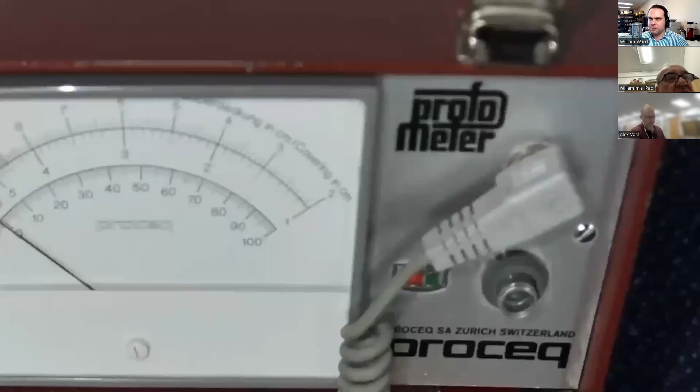Also today, I'm pleased to be introducing the latest generation of the Profometer cover meter. That's the PM8000. We can see the original Profometer here. And now we have what we're showing today, what we've come to. And we'll have a full demonstration of the application and the cover meter operation during today's presentation. We'll get to that towards the end.

So once again, we're going to begin. Now, does that video come through clearly for everyone? Is everything flowing smoothly on the operational side? Yeah, looking good. Now we're good, yeah. Excellent. Thanks so much.

So look, what I'm going to do from an education standpoint today, I want people to understand the pulsed eddy current cover meter theory. I always like to talk about this for cover meters because it's what makes them such a precise measurement tool, but it's also something where it's easy to get it wrong or to not see how it makes the procedure need to be a careful one when using the tool. We'll also talk a bit about what we can measure and what we can't measure of different reinforcing types and structures and ways of building things.

We'll look at how to scope up a cover measurement procedure. So I've got everything from basic spot measurements, which might be great for quality control, up to an overlaid 2D map of the reinforcing layout, which is ideal for showing an output to someone: here's what you really have, and here's the bits that are of concern. So we'll go through all of that. I'll give you a procedure, which I personally like as a way to get a precise, careful cover measurement as unaffected from interference as possible.

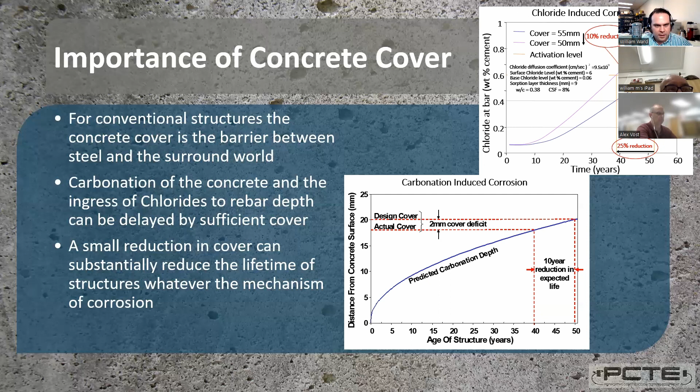So this is not a corrosion presentation. There's always the chance to go back into more detail on these areas. But I do want to highlight this as we keep going forward. So I did ask you all to send me a few questions before we begin today's presentation. There were only a few that came in.

Someone wanted to see a comparison of the PM8000 to the Profoscope Plus and Profometer models that were available from Proceq or Screening Eagle Technologies before. The basic thing there is the PM8000 is available in two models: a PM8000 Basic, which is only a spot measurement cover meter, and that's loosely feature equivalent to a Profoscope Plus cover meter, which was one of our most popular products prior to the launch of the PM8000. Whereas the PM8000 Pro, which has full integration with the PM Cover Meter app, goes to the same level and beyond the functionality of a Profometer PM650.

So the PM650 offered cross-line scan, showing the reinforcing steel in two directions on a structure. It also had the ability to import and export full presentation and a variety of other tools. The only functional difference on the Profometer PM8000 is that the app goes a step beyond. It includes augmented reality and a cloud-based data flow, but currently it does not integrate a Profometer corrosion capacity. So your half cell potential measurements would still be done using a different machine. This is a cover meter only in the current configuration.

Now, best results for reinforcing size and position I will be covering during the general presentation, so please hold on, along with the depth and accuracy of the PM8000 cover meter. Now, for depth of hold down bolts, generally, you don't want to be offset. Your successful location and measurement with a cover meter is very dependent on the reinforcing steel being oriented straight behind our scanning probe. And I'll show you how to do that as we work.

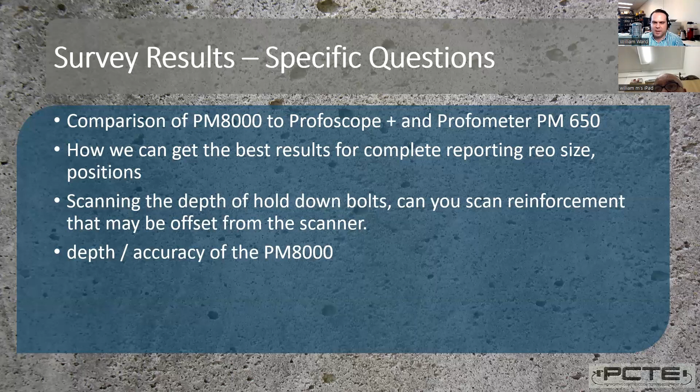But if you do have a more unusual job, things like maybe tie rods in brickwork, we can perhaps use our cover meter's signal strength detection as a tool. But I generally don't suggest using cover meters outside their specific purpose, which is accurate, precise depth of reinforcing steel. That said, we do have other technologies we can bring in to our hunt for detail.

So I'll be mentioning today Screening Eagle Inspect as a hub for data from all of these kinds of machines and going beyond that. I've also already contrasted its performance to ground penetrating radar tools and ultrasonic tools like the Pundit Impact or Pundit PE and UPV. Schmidt hammer is a little outside the context of today, but our main focus is Profometer, cover and rebar diameter, rebar characterization. That's what we're focusing on today.

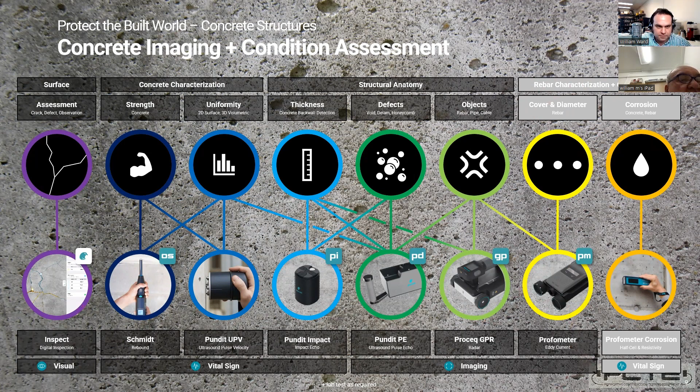Now, back to our survey, and this is always something which I have to talk about every time, because I've been working to support our customers in the industry with tools that are complex non-destructive test equipment. And I always see that people can be fantastic, skilled users of a complex survey process, but they maybe don't gain the same comfort and grasp with the data logging functionality of their tools. And I can see this again today.

We had 94 people sign up for this webinar, and they each gave me a few notes about how do you collect the information from your cover meter? Clear winner, and I did expect this, was they keep paper notes. They write down the cover measurements straight on a piece of paper with all the other notes from site.

One of my absolute least favorite ones is photographing the device screen, because then you compound the problem you have coming back from site with thousands and thousands of photos. Now you've got additional photos with no identity with the measurements on that cover meter.

But more than 10% of people are using internal data logging or the phone or tablet app. So let's call that clear. 20-30% of people do use the internal data logging function. So that's great. It certainly wasn't like this 5 years ago.

And one thing I will highlight is that third-party data recording or database app. That's always an interesting concept. That's what Inspect is. So I'll show you that a little later. But in essence, by a database app, I mean a way to tie some of our cover meter measurements into a record of where we were and what we were surveying.

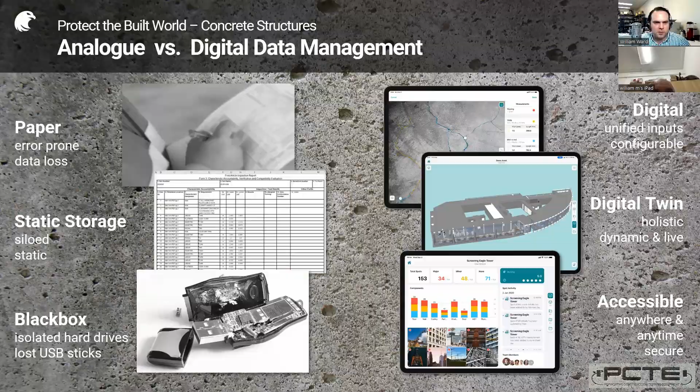So this is not an Inspect presentation, but I always like to talk about the power we have available. I see Andrew's actually provided some context that not every paper note is equal. He's actually doing a survey with physical markup of the structure, chalk or crayon, and photographing the outcomes and using a dictaphone. So there's always clever ways to work. But sometimes we do have these tools that can improve our workflow for the same outcome and just allow us to prepare and document on site.

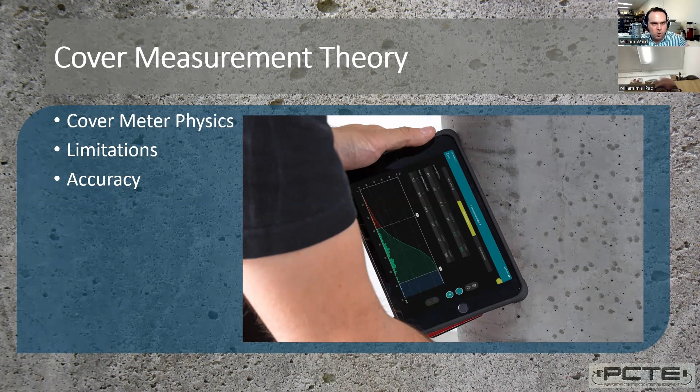All right, let's go into the theory now. I'm going to talk about the physics behind what we're doing and the accuracy and the limitations of eddy current cover meters. So this is a very simplified explanation of what we do with an eddy current cover meter. We apply an alternating current signal to an electromagnetic coil. It induces a matching current in the reinforcing steel. We measure the strength of it. The cover meter becomes essentially a signal strength meter. And what that signal comes from is the presence of reinforcing steel close to our sensor.

It's useful in some ways. We moved away from ferromagnetic cover meter measurements because there's less drift in this eddy current procedure. We've been using this in the previous generations, the Profoscopes and the Profometer cover meters, and in the Profometer PM8000. So if you're familiar with those previous cover meters, you're going to have the same capabilities and limitations on this. We haven't changed our measurement technique.

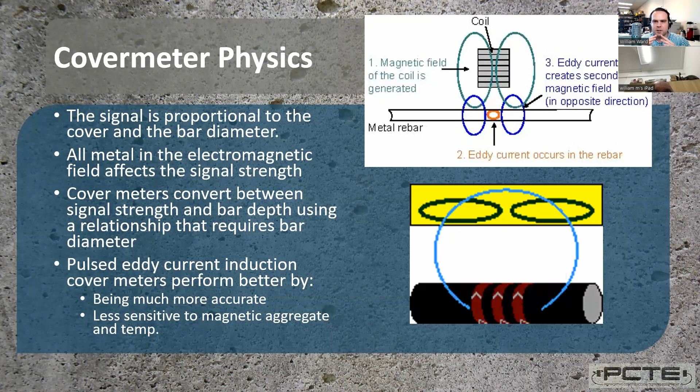We have changed and essentially combined the features of the Profoscope Plus and the Profometer PM range so that we have side to side and top and bottom coils to give the best location for our cover measurements. And I'll demonstrate that. So here's a better illustration of this eddy current measurement principle.

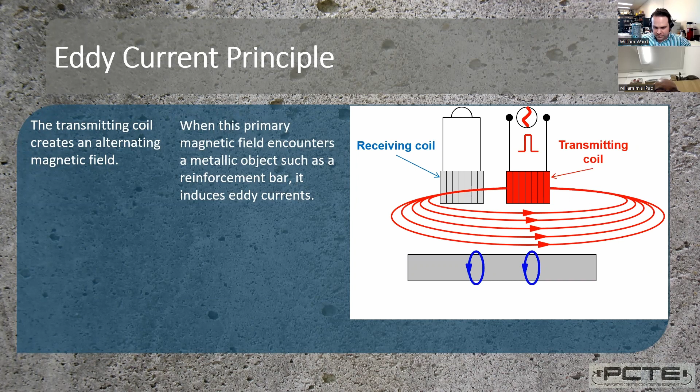The transmitting coil is energized with alternating current and produces an electromagnetic field. We get a corresponding current, so electrical energy induced into the reinforcing steel. It produces a matching electromagnetic field, and we measure with our receiving coil the strength of the electromagnetic field.

Now, there's a couple of things we can do differently. We can put more or less current to the transmitting coil, which means the field it produces is bigger or smaller. And if we've got a bigger field, that means it's going to fill a larger area. So if we're trying to move into very dense or complex reinforcing layouts, sometimes we want to limit the energy of our transmitted field.

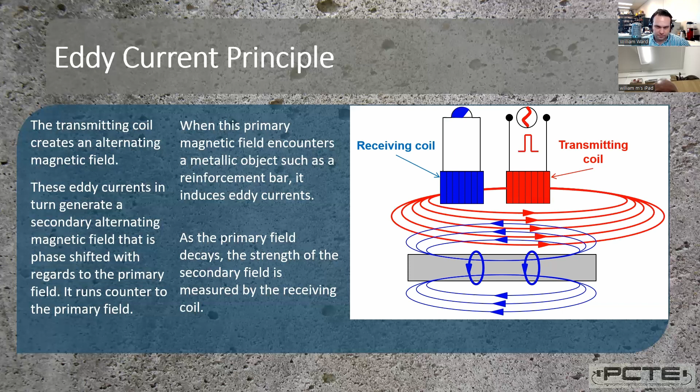Now, there's two things we can change about the reinforcing steel that's near to our cover meter probe. I am assuming that the cover meter probe is correctly lined up over a single rebar. And our procedure I teach later is going to be all about correctly lining up your cover meter probe over top of a single reinforcing bar. If we have that reinforcing bar brought closer to our coil, the effect is going to be one of an increased signal strength. 1 second.

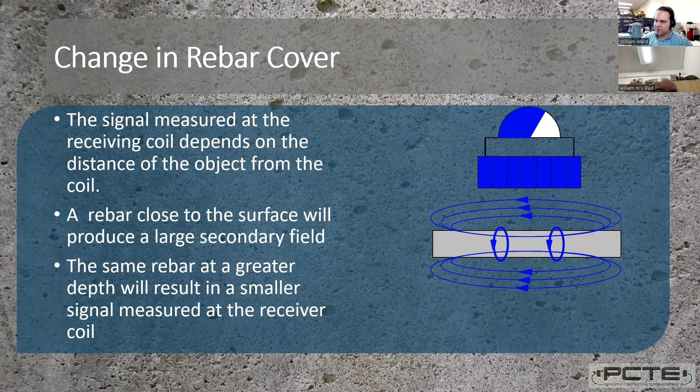The effect is going to be one of an increased signal strength. And it's going to be quite a substantial increase the closer that reinforcing steel gets to our cover meter probe. This is why we can call our depth measurements so precise. If we have a big change in the signal we measure, going closer or further away, it's easy to relate that to a change in the measurement we care about, which is distance cover meter probe to reinforcing steel.

The other measurement that we can take with the cover meter is an estimation of the rebar diameter. And you're going to hear me harp on this again and again today. This measurement is an estimate of the rebar diameter. I consider and have seen with performance in the field that we don't want to use our diameter measurement as the first reference for bar diameters. It's a useful estimation tool, but if you're doing something critical like design work, you'll want to be using visual inspection as part of your process as well.

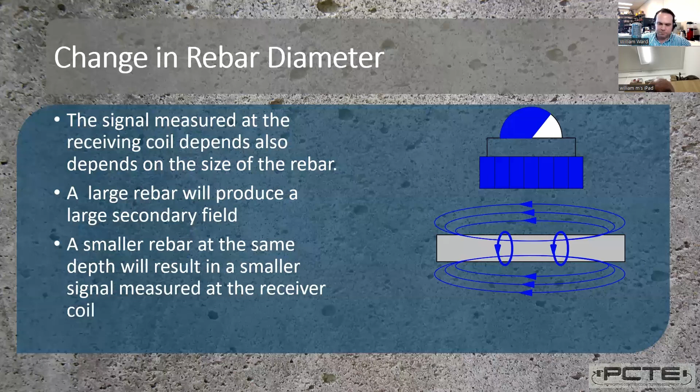But just to highlight, if I increase the size of the reinforcing steel, yes, I do have increased signal to my cover meter sensor, the eddy current procedure, but it's a small increase. And the fact it's a small increase means that it's much harder to establish difference of reinforcing bar size than it is to establish the difference of the depth of that bar. That's why I call it a cover meter measurement, cover depth measurement, and a rebar diameter estimation.

Now, we do have some limits on these tools. Your maximum depth is controlled by how much energy we can kick out from those coils. And it's going to be somewhere from about 150 to 180 millimeters absolute cover depth. You will find that the deeper you go, the more difficult it can be to use the location function of your cover meter. So there's two things cover meters get used for where we roll them or move them across the surface. They can locate the reinforcing steel and they can measure the depth of it. The ability to distinctly see an individual bar is lost before the ability to measure its depth is lost.

So we're never prevented from doing a useful cover survey, quality control, making sure we've got sufficient reinforcing cover. But if this was being depended upon as our reinforcing bar location tool, that will be unavailable if bars are too deep and too closely spaced together. The bar pitch is too small. We do have correction factors to account for any interference caused by the bar pitch being too closely located.

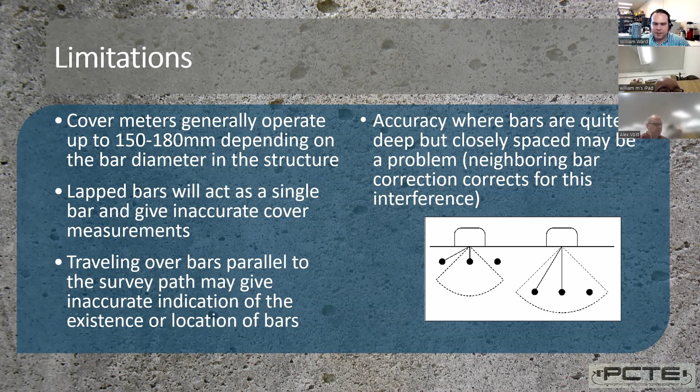So I'm going to talk about accuracy now. In general, for accuracy of the measurements, we've got a standard measurement range and a deep measurement range. And within the first 40 millimeters, we have a 1 millimeter precision on the depth measurement, provided the correct reinforcing diameter is entered. And I'll talk about reinforcing diameter entry as we talk about using the cover meter. The diameter measurement is only possible down to about a maximum of 50 millimeters. And that precision is a number I wouldn't give a plus or minus value to.

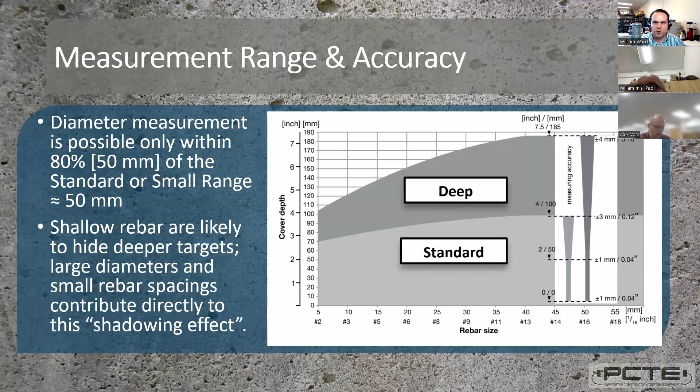But just to read off the rest of the chart, at 0 to 40 or 50 mils depth, we have a 1 millimeter precision for cover depth measurement. Around about the 80, 90 millimeter mark, we're creeping up to around a 3 millimeter precision and about 4 millimeter precision at the absolute maximum range of the cover meter, out to that 180 for quite large reinforcing steel. And there's about a 4 millimeter variability in that number. So the closer, the better, but we are achieving some of the requirements like the Vic Roads requirements for 1 mil at 40 mils depth precision in cover meter measurements.

Now, when we're setting up our cover meters, we need to enter in information like the expected reinforcing diameter. And people always ask the question, well, it wants to know the diameter. What do I do when I don't know it? First answer, work it out. Find a drawing, break in and inspect the reinforcing steel is always your best way. If you want a really precise and careful cover meter survey, it's always good to include 1-2 points of visual inspection to confirm the measurements of the machine and make adjustments if necessary.

But if we don't have the ability to do that, we do have to start making assumptions. Now, first thing, default setting, what I set my cover meter to, if I don't know the expected reinforcing steel size, is 16 millimeters.

This might not be a good setting configuration because it's likely we're overestimating the cover depth in this case, and if we're using it for quality control, we don't want to overestimate. So maybe there'd be a case to change that setting to a smaller bar diameter and push our variability towards under-reporting cover rather than over-reporting cover.

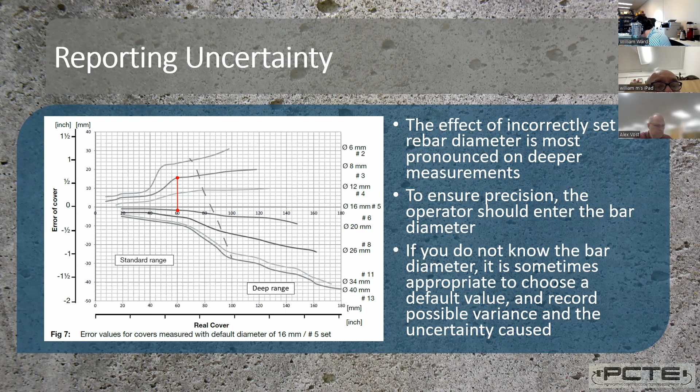Now, the diameter estimates. The way the diameter measurements work is we have a standard and a deep measurement range. It's possible to compare the result from a standard and deep measurement range and to look up from a table of expected results what diameter would cause those two measurements.

Again, the difference in signal is quite limited going from small bar to large bar, so this is an estimation of this measurement. It's not something I want to give an assumption on.

The other thing is this measurement is very heavily affected by other reinforcing steel. So if you don't have a single bar miles away from every other reinforcing steel bar and miles away from other metals, cables, second layers of reinforcing steel, there's lots of sources of interference that can make this look closer.

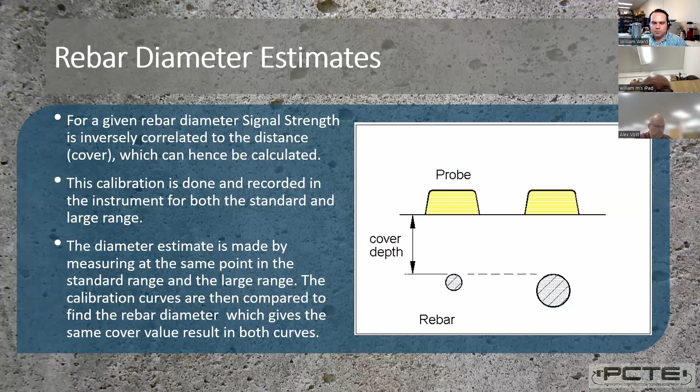One other source of interference we do see is welded reinforcing. If you have a welded reinforcing cage rather than a conventionally tied together set of rebar, the bars will look gigantic on the diameter estimate, and it will also provide more signal to the cover meter. So the apparent depth of bars that are welded will be more shallow, closer to the surface, than for unwelded reinforcing. So that's my basics.

Let's talk about how we actually set up for a cover survey and what are our considerations during that process.

So firstly, what is the scope of the job? I've got a couple here. Maybe we have an absolute minimum cover that we must achieve over the whole structure, and we're using our cover meter configured to let us know if we're below that. So if you've got a 50 mil minimum cover, we can configure an alarm on the cover meter just to let us know when the cover is more shallow than that and scan the entire structure quickly.

Spot checking. The only caveat I would make there is just make sure you're isolating individual bars. We'll talk about that procedure. It is possible to get false failures when you're doing minimum cover surveys.

Others, we care more about the statistics. I've given a little image of the statistical data on the left there. Maybe we care about the average cover depth and are using that for calculations of durability or other factors. So we can get that straight from the spot measurement modes, line measurement modes, or the area scan measurement modes of the cover meter.

Maybe it's about bar location or documenting the layout of the reinforcing bars. Again, we can use different survey modes to achieve that, and try to get away from only relying upon sketching on the surface the reinforcing layout. Don't discount the power of a sketch though.

I'll talk about that. Maybe we do need to use it for diameter estimates, but if we're doing that, it's not your master tool - physically inspect bars. Maybe the cover meter can help you know that section over there is loosely similar to this section, but just don't depend on it.

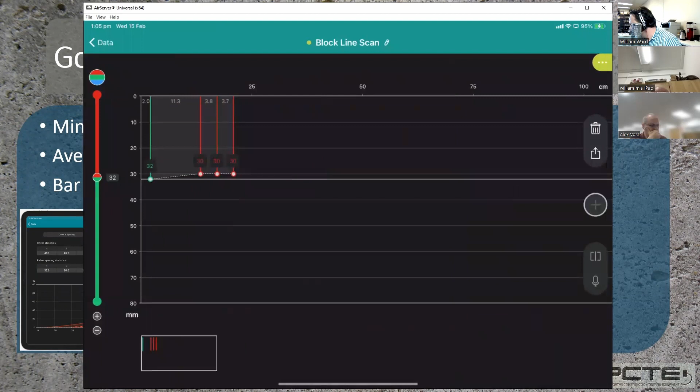You would get a signal response. That's my point, because I don't want to drag my nice GPR over the sewer surface—I just want to be able to run something in a plastic sheet across and see if this looks like something. So you do get a signal response on the chart. Now this is with the wheeled cart, but you don't need to use it—you can just move the cover meter probe in a bag over that.

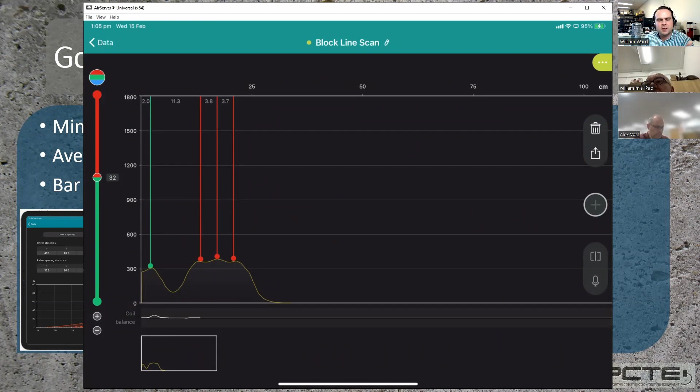Your tunnel lining isn't steel fiber reinforced or anything, is it? No, it's 16 to 20s at 200. So, or nothing—okay, no problem. So basically, if we've got other reinforcing, that'll probably be the thing it finds with priority.

But if you've just got that C channel behind there and it's big enough to kick a signal through the lining to our cover meter, the depths will be off from your initial calibration. In fact, the depths will probably always be a little bit different than the same amount of metal in a reinforcing steel bar, but there will be a signal available. And if you're doing some drilling or mocking up that same kind of C channel, and you know the signal at a certain distance, you could set it up for maybe a go/no-go by choosing a fixed reinforcing bar diameter and entering a minimum cover, which you can do in the control of the basic machine.

And that works the same on a Profoscope cover meter, if you've got a previous generation unit, or the Profometer PM models can do it too. So there's ways to go about it. It's definitely worth exploring the tool, but you'll need to document a set of standard settings and what you consider compliant and non-compliant. It's not going to give you that number straight away—you're going to need to feed your number backwards into values from the machine that you're going to call good or bad. And you still have the same limitations—you need to be going to an isolated piece of metal, not other ones nearby.

So watch out for that too. That might be worth workshopping a bit more, but it's a good example of another job.

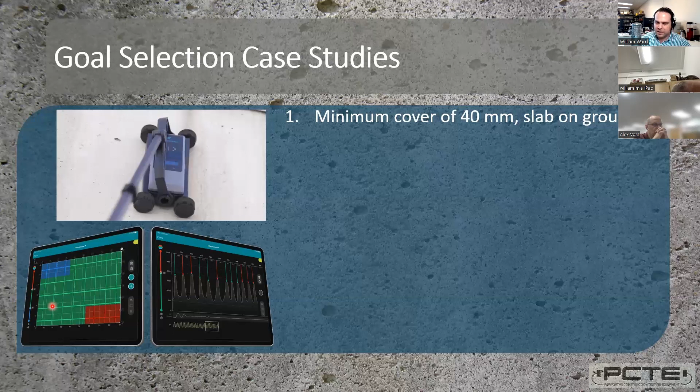Don't all shout at once. Come on, I'm watching. So we've got a cover meter response on the chat. Depends what you're trying to measure. Are you measuring the thickness, GPR, or the reinforcement with a cover meter? That's right. If we've given minimum cover for slab on ground, you'd want GPR if you need depth of that slab on ground.

So what about for a bridge girder? 100 millimeter bar spacing, additional reinforcing steel at the edges, so we've got a very dense reinforcing layout and the same minimum cover. Any thoughts about how this might affect our survey and our requirements?

I think you would need to be using GPR for that, so you can look through the multiple layers and get a sense of what you're actually seeing. You're quite right. For quality control, there are ways we can make use of cover meters as well. But if you came out on this job and you didn't have a drawing, or only had a rough drawing, I'd pull a GPR out. The cover depth wouldn't be quite as precise. I consider GPR to be maybe within a centimeter of the real depth - that's my opinion - but it'll be the easiest task.

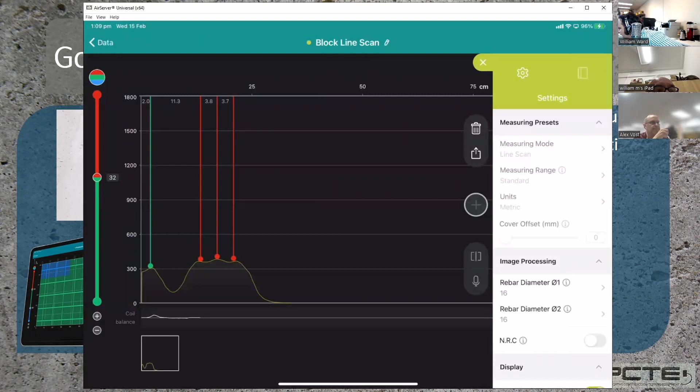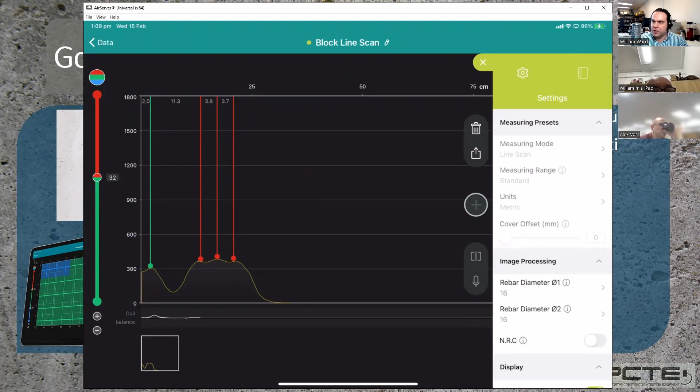One thing I'll point out is you do have cover offsets and neighboring reinforcing settings, and some calibration modes on cover meter tools. So if it was a quality assurance job, if you're a precast yard making these girders, you could still use a cover meter procedure. Precast yards use lots of cover meter survey - they tend not to be GPR operators. They can be configured to give those critical measurements, or at least a go or no go. But if you're an inspector, yes, GPR every time, at least until you can find a spot clear to get a precise depth with the cover meter on an isolated bar.

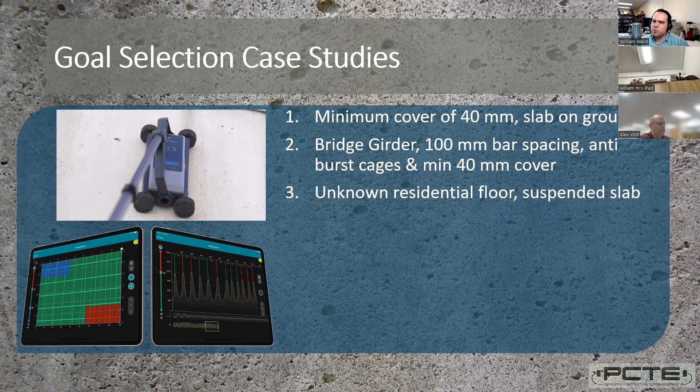What about a similar question: an unknown residential floor, but it's a suspended slab. Cover meter is not a bad process here, but it's a suspended slab. What do we have to watch with suspended slabs as operators of tools like this? We need to have the reinforcing in the bottom of the slab at the extremes, in the top over the supports, and the bottom at mid-span.

That's right. So you might need to consider there could be two levels of reinforcing, or additional steel around details like columns and beams. Also, there's the chance it could be a post-tensioned construction. If it is post-tensioned, that can be more difficult.

Now, I've got a couple of examples about scanning before drilling. I know that one of the attendees mentioned about drilling already. We've discussed that a bit, but anything else to think about where cover meters sit on this scan-before-drilling application?

So they may not pick up electrical cables. Exactly right, and that's just one point of why a cover meter cannot be your master tool for drilling. Anything else? Or plastic water pipes. Yeah, or gas or whatever. Yep, we could list a dozen things. A cover meter is sensitive primarily to reinforcing steel. Now, the Profometer is an eddy current cover meter, so other metal I call interference to it. So yes, it might get some effect from other metallic targets, but they could be too deep.

We certainly can't find plastics. Frankly, scan before drilling is usually not a cover meter job. It's more of a ground penetrating radar job. There's a couple of very specific cases where people do use cover meters.

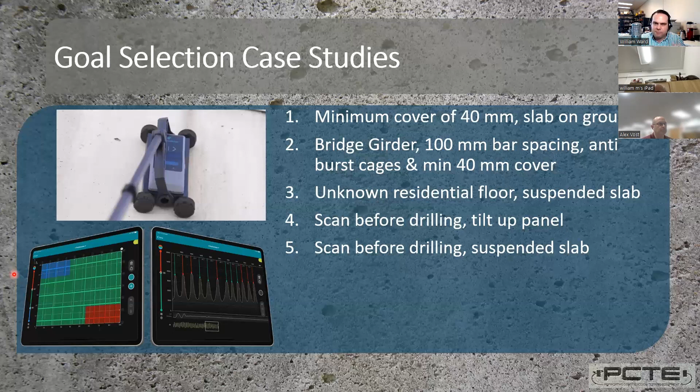One of the more common ones is things like facade installation on piles, or basically something where the construction is already known. They already know it's only reinforcing steel, and they use the cover meter as a little handheld locator. That's okay. But if you don't understand everything there, you don't know how deep you need to go, I would steer well clear of cover meters for scan for location.

What about some remediation considerations? What do we need to think about when using cover meters for dilapidation work or remediation assessments? Is there anything special there? I've got a few points I'd like to make, but I'd be interested to hear what the floor has to say. I often use cover meters for dilapidation surveys over GPR just because of the fact we're looking for precise depth and the closest depth.

Because as we saw in the first slide, chloride and carbonation are the biggest issues that we've got, and so you can get lots of data and put it in a big spreadsheet and do some statistics on things and map areas and calculate risks. Brilliant. That's basically one of the first points I wanted to make.

And also, the other thing I would probably add to that is when you have an existing structure that is already showing signs of corrosion of the steel, as in spalling of the concrete, you can very quickly look at other areas of the structure and give an indication as to the other areas where it's defective and therefore likely to be experiencing corrosion in the future.

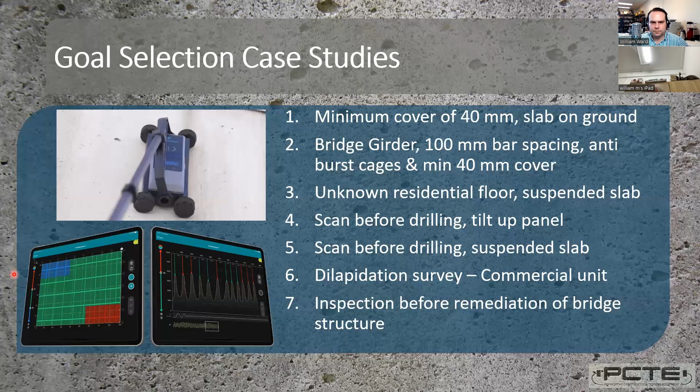And therefore, is it worthwhile repairing one place and then in 2 years or 5 years time, you're doing the same thing with the rest of the column, or do you replace the column or reinforce it otherwise? Yep, perfect. Now we've spoken a lot about how we can use these tools and which one to pick.

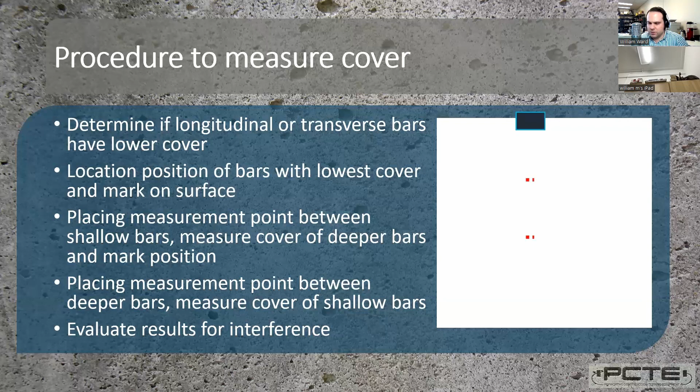Let's talk procedure. The most important point with a cover meter is avoiding interference. We want a single reinforcing bar aligned straight along the measurement path of our cover meter, protruding a bit above and below the cover meter. And we need to ensure that before we take our numerical measurements. So we need to work out which bar is closer to the surface. And I'm going to start doing that by marking the position of my reinforcing steel on my survey area.

And then I can bring my cover meter through an area completely isolated from parallel bars. By parallel bars, I mean bars that I am rolling my probe in the same direction as, and I can start to collect good cover depth values. Then I can resurvey my previous points, moving in between them. I've got an area scan video where I do exactly this. I'll show you in the demonstration section.

So this is basically the way to master a cover meter. If you just push it on the surface and take the number off, you could easily be aligned with a bad measurement point. If I was to take my cover meter and put it right here, I'm going to be recording a cover depth that is too low. Whereas if I'm aligned perpendicular to the bar, so directly over top of that bar and isolated from the ones surrounding it, I'm getting correct cover depth values. That is always your main priority.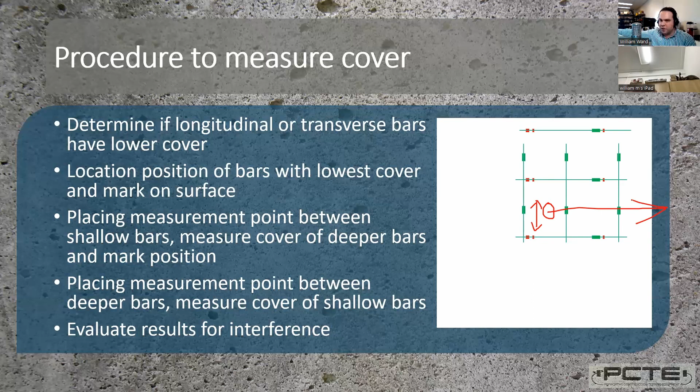Also, the Profometer PM8000 brings a feature back from the previous Profometer, which is a signal balance. So I'll also show how to do a signal balance when you're doing a single line scan. It is possible to take your cover meter probe, essentially move it up and down over a region, isolate the center, and then start scanning along. I show that in my line scan demonstration, how to use the balance function, the top and bottom signal, to then go straight over isolated bars.

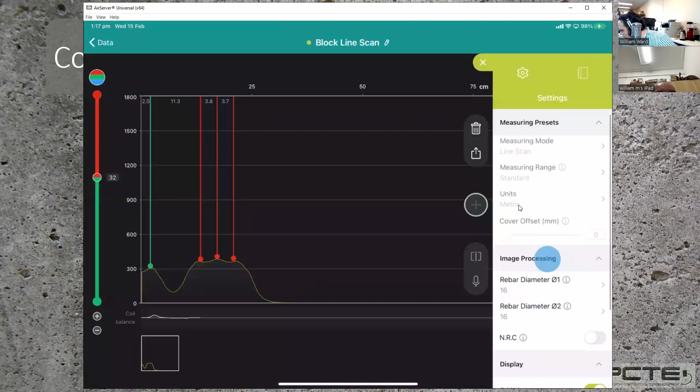Now, a little bit of interference. We want, and I've highlighted it in green, a single bar inside the electromagnetic field of the cover meter. If the bars get too close, we need to use our neighboring rebar correction function. You can see this here. It is used to correctly measure depth when bars are closer than 140 millimeters. And it considers bars in both directions.

It's quite sophisticated. I'm not going to teach this today because this is more about general processes. Other cover meters might use things like spot probes that have a more narrow electromagnetic field, but this is the Profometer approach. The other one to highlight is we have our measurement ranges.

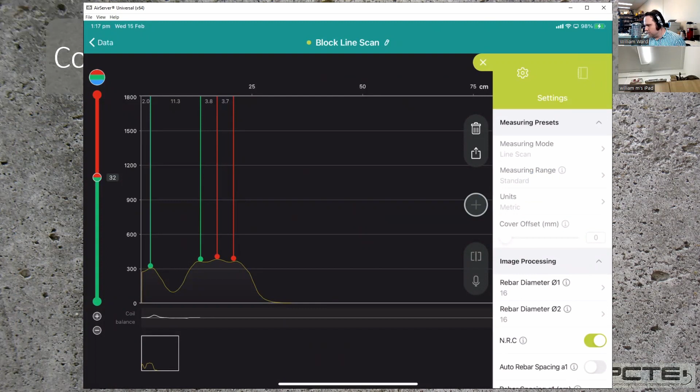So this is in standard, and I like to keep my cover meter in standard unless it can no longer measure the depth of bars. Then I turn it into long. The small standard has a smaller electromagnetic field, which makes it easier to get a situation like this.

Now, one of the other reasons we draw up our reinforcing layout is every reinforced structure is going to have places where reinforcing bars are lapped, or there's additional reinforcing steel from things like seismic or other reinforcing details near columns and walls. So you need to take a bit of time choosing your survey places to isolate individual bars and avoid lapped reinforcing.

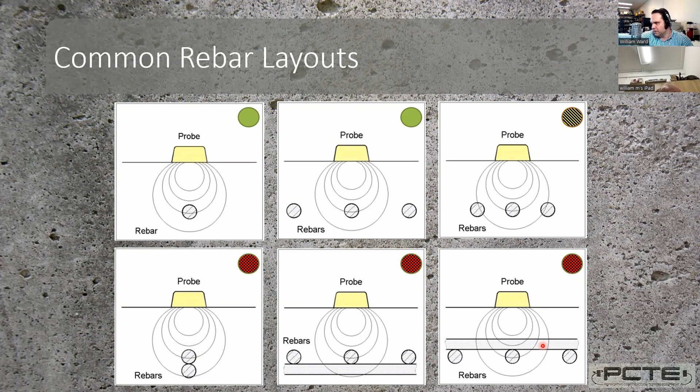And I've already highlighted, we want to avoid parallel bars. They will reduce the apparent cover, whether the bar is above or below the bars being measured. Also, we just need to consider, have we entered our bar diameters correctly? Have we accounted for the spacing between the bars? And just watch out where bars are on an angle.

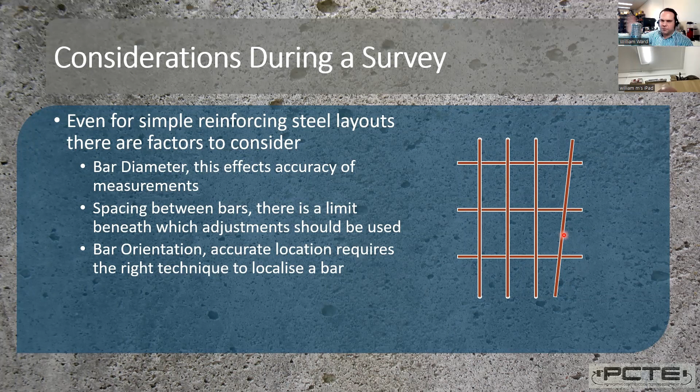Something you can always do with the cover meter is push it upwards. We've got indication arrows on the Profometer that show if the bar is directly underneath or to the left or right. If you push it upwards and the bar walks left or right, you know it's at an angle to the way you're rolling the cart.

When it gets more complicated, this is the situation where we discussed that maybe radar would be a useful friend or an alternative. If the cover depth isn't for durability, it's more for just understanding how things are built, maybe the cover depth on a radar is accurate and will make the job more correct. But there are places we can place our cover meter here that are good places to survey. We can isolate single bars, we can find clearer regions.

We could even, if we don't have drawings, bring our radar in to find the good spots, take a more accurate cover depth measurement with our cover meter and calibrate the depths on our radar from that more precise measurement. So a lot of functionality, and a lot to consider. The more complex your structure, the more you need to allow for a careful process, destructive confirmation, and use of supporting tools to get the best cover depth measurement that you can.

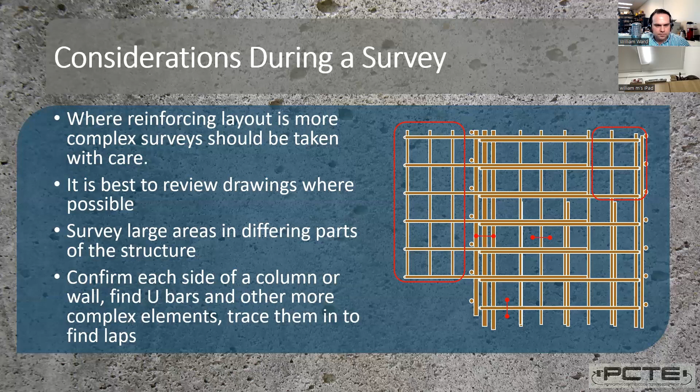So let's quickly look at some actual examples from the Profometer. First one, the locate mode. This is just showing how the cover meter can find individual reinforcing steel, isolate it and take the depth measurement. So I move my scanner over, it lines up, and I'm reading a cover depth of 31. And when I get to these more closely spaced bars, they're reading in at 30 as I cross them.

I would ideally add, and I can do this on the handheld probe, my neighboring rebar spacing. That'll probably bring it back up to that 31 mil measurement, not a 30 mil, because all these bars are at the same depth.

If I need statistics, I know that one of our attendees mentioned they want to take a large statistical data set, I can use spot data. So in this example, I'm going to bring my probe over each bar and take a spot measurement, counting up number 1, number 2. This video will speed up in a second and I'll fly past.

I didn't add the Benny Hill theme, I'm sorry.

But this will let me collect a large data set of individual measurements each time I locate and tell it to take a spot measurement. And the outcome of that is going to be that statistical data set. It'll show us our minimum cover, our maximum cover, and all our results.

So just give me a second. There's the app popping up. It's just a Bluetooth connection. It pulls the file recorded on the probe into the cover meter app. And there's each of our measurements. I can use an indicator to say, is it compliant or not? That just helps me clear up.

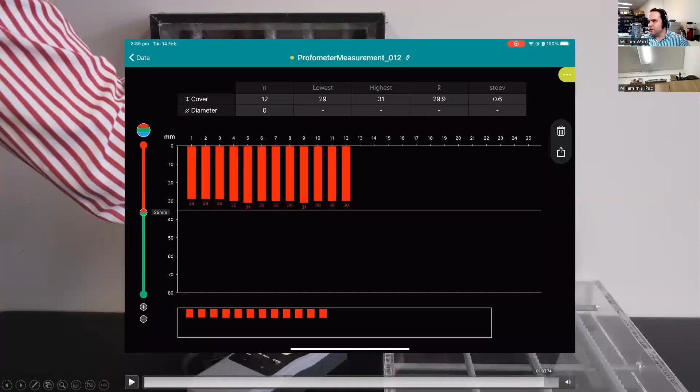So I'll just show that in a little more detail. We can see there, I can use indicators. I've got 12 measurements. Lowest is 29, highest was 31, mean is 29.9, standard deviation is 0.6. It lets me pull that together quickly. And that's data logging that's available just with the probe outside the handcart.

This is also the functionality that the PM8000 basic cover meter comes with. You do receive the cart, but the basic app doesn't use the cart. You could upgrade if you'd like to use this functionality, but the handheld probe mode is all available there. And if you're comparing to previous models, this is the same as the Profoscope Plus cover meter.

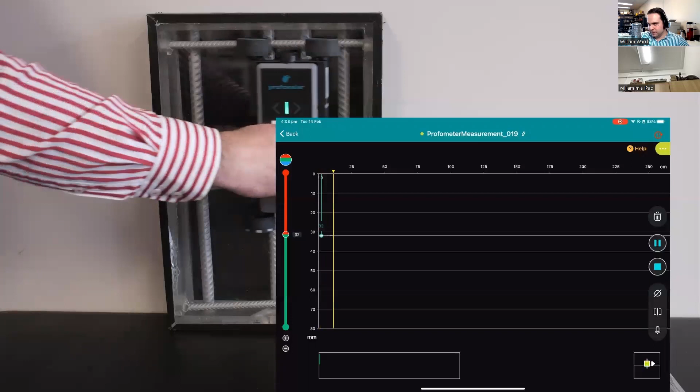Now I'll do a line scan measurement. So again, I'm going to make things more difficult for myself in a second, but for now I'll leave my exposed bars and we'll do a quick line scan over top of those. And we see how we can map out bar position in a straight line. Hold on one second. There we are.

So letting that continue. Now we also can show our signal strength, and I am an absolute fanatic for the signal strength view on a cover meter. We talked about how we want to isolate bars from neighboring bars. We can almost see what's happening on this. I can look here

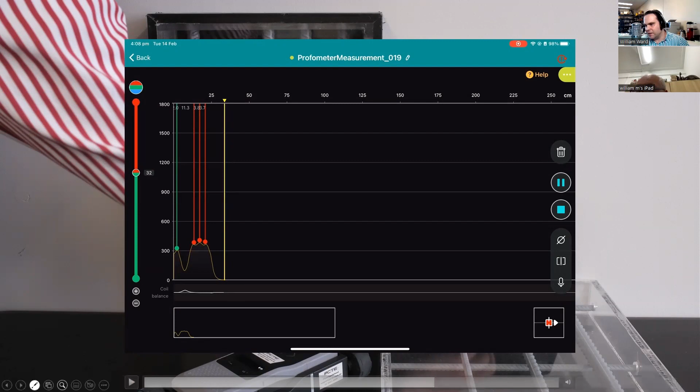and I can see I've got a single bar, that first bar across there, the three I've crossed there, and how the signal from them doesn't die out from the first one till I've reached the second one. It's incredibly informative for the way I like to teach using a cover meter. The same statistical information is available for these line scan views.

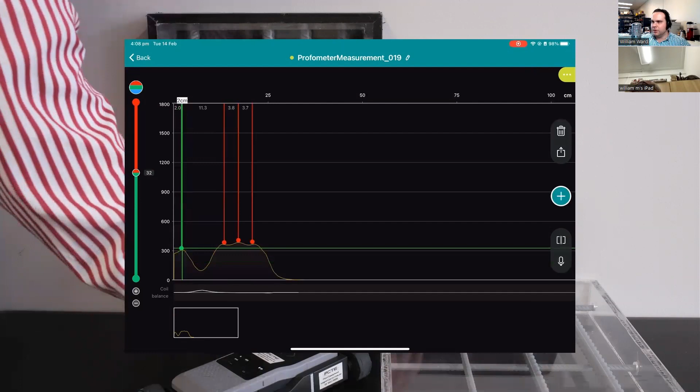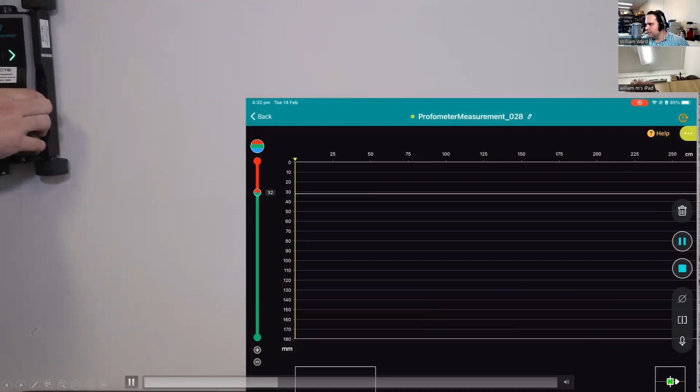So let's make things a bit more difficult for the next example. Now I'll just work on the office wall, conventional reinforcing, single layer. Now, I mentioned the balance, so I'm going to slide my cover meter down and I'm going to watch that circle on the right here. And I'm going to wait until it shows green and I'm in between the top and bottom parallel bars and then roll across. And now my cover meter is going to, again, find each bar, give my depth.

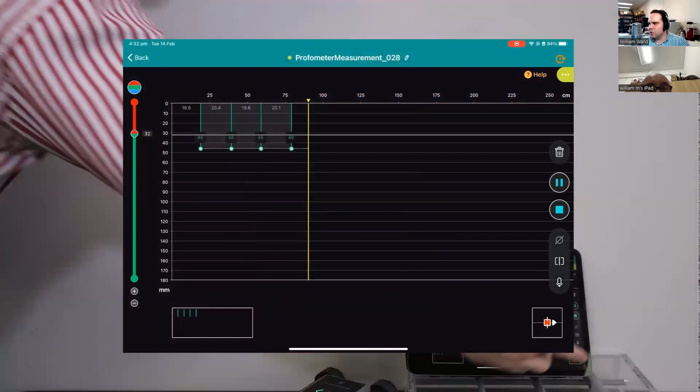It can give me the same information I had before, but done without line of sight to where the bars are. And you can see that balance coil changing as I move my cover meter probe back down to the ground. And there's the individual results and the signal that we received. And just again, that statistical information, so number of measurements, standard deviation, and everything else about the spacing as well. So we also get spacing information when we're using the line scan surveys.

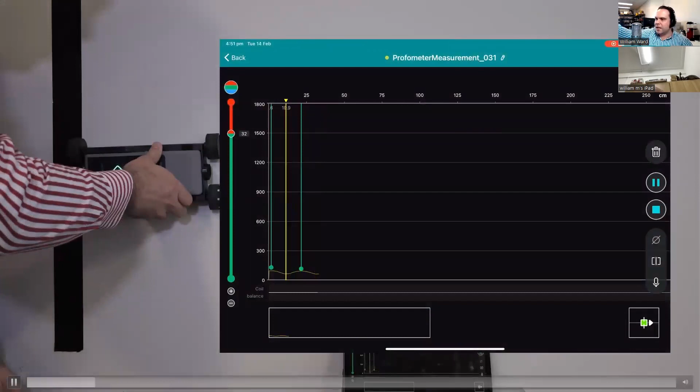Now the showstopper, let's actually overlay the cover layout here. And I confess I rather damaged the office wall with that tape. It didn't come off very cleanly. But first, I'm going to find my clean survey point. I'm finding the spot in between two reinforcing bars using my signal strength view before I set up how I'm going to do my horizontal scans.

We'll quickly mark up a spacing of 200. From my previous measurement, I know my bar pitch is 200 millimeters, and I want my measurements to be every 200 millimeters. So every scan is in between the previous bars.

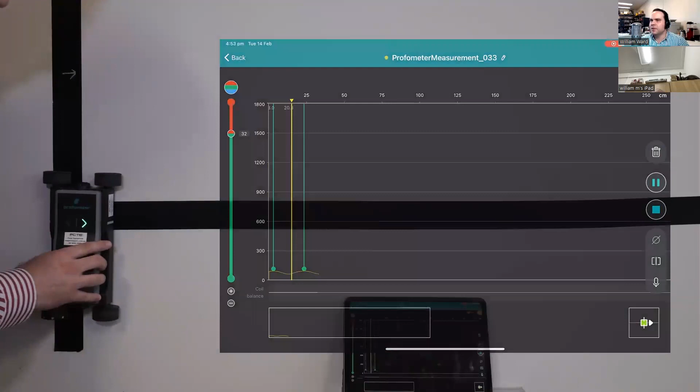So again, I'll get my balance point in the other direction. I'd already checked this, so it's really in line with the side of that tape, but just reconfirming, and then I'll do my vertical scans too. Again, bar pitch here is 200, so everything is now set up to essentially move my cover meter probe through the parallel positions. And I'm going to input that into the app. The plus icon lets me tell it 20 centimeters, 20 centimeters. This is the space between measurement lines. Fantastic. I'm good to go.

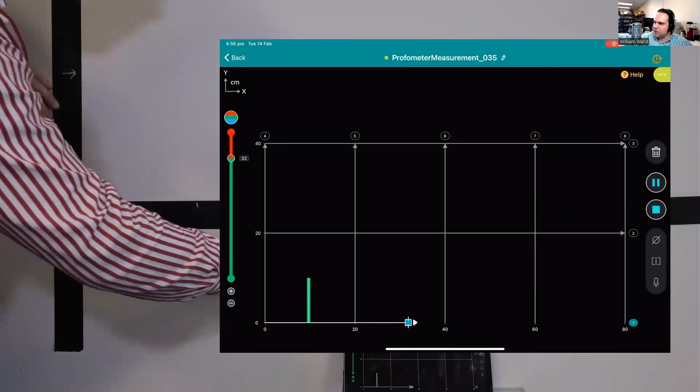I'll do the scans essentially like the line scan. We place at the beginning, press the button on the side of the cover meter and take our measurement. So I'm going to pull it back, get it straight over my beginning point. The line along those arrows is where the measurement occupies. There's the first measurement.

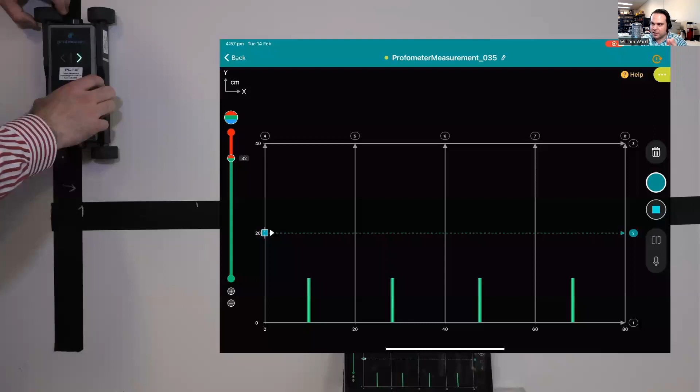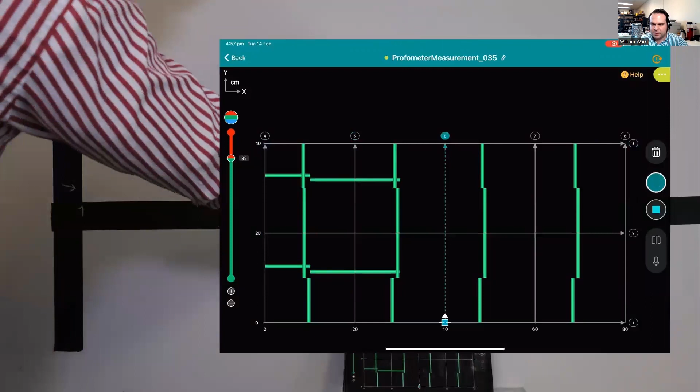You need to be careful to be in the right starting point, and there'll always be just a slight difference between the bar positions, but they'll line up pretty cleanly, provided we're careful to get our start point. The other thing is when I present this in augmented reality, I'm going to turn on the area scan, which is cover depth for that region.

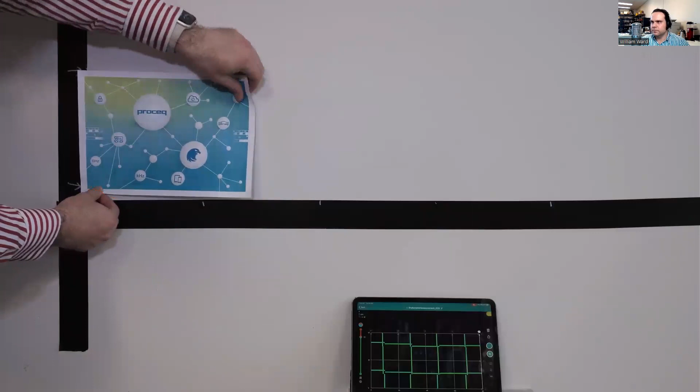So I've taken my measurement. I've got a reinforcing layout. I'm going to put a target for the augmented reality onto the wall. And now we'll be able to project that measurement using the iPad. So there it is.

And that's our projection of the scan in position. Okay. That's sort of the bulk of what I presented today. Did anyone have any final questions or anything they'd like to see demonstrated inside the application before we finish up

the main session today? The signal strength you were showing, that's in the basic functionality, isn't it? Yes. You do have a signal strength indicator in the basic functionality. It's just a numerical readout on the scan card.

So I'm looking at starting a project which is going to be a precast project with a lot of what you sort of mentioned before. They're culverts, but they've got some shear cages in them. With that being an extremely busy environment and us needing the quality control check on the depth of the reinforcement, how accurate are we going to be able to get this if we tell it, in the lead-in, to put on the mode? I can't remember what you named the mode, but allow for the bar locations. How accurate are we going to be able to get our readings?